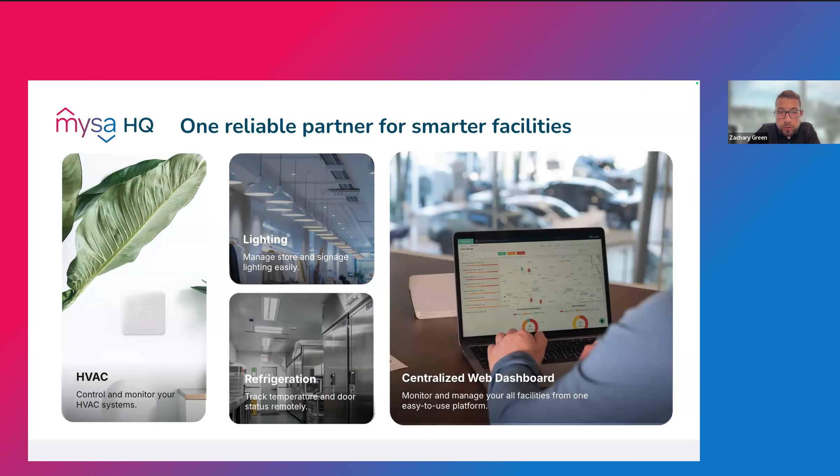Yeah, thanks Kyle. I'm happy to be here and represent Mysa HQ today. I often like to tell people when I describe Mysa HQ that we are a reliable partner for smarter facilities. And I like to say partner because we view our relationship with our customers as more than just selling connected thermostats or refrigeration sensors. We're often the go-to source or a trusted advisor for addressing various challenges or issues our customers have.

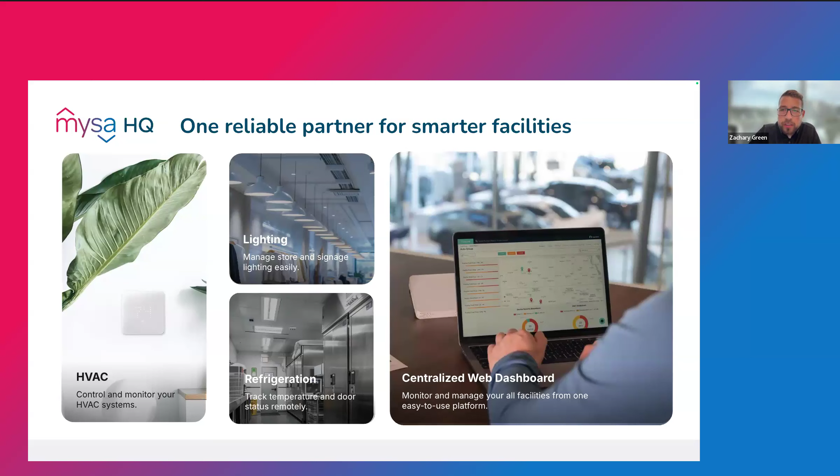And one challenge we've heard repeatedly from our multi-site customers, particularly in California, is understanding the new California heat illness regulation that came into effect last year, and then turnkey solutions for meeting compliance. So that's why we wanted to put together this webinar today, and I'm super happy that Eric's here to join me to explain more on the legal side, and I'm here to talk about the tools and solutions for meeting compliance. Great, thank you Zach.

So let's start at the top. Eric, why don't you give us an intro on what the rules actually state? So what are we talking about here? Sure Kyle, again thanks everyone for having me.

I am going to go briefly over the rule. The heat illness rule for indoors was a long time coming in California. As everyone may be aware, California has been enforcing outdoor heat for quite a while. This is really a data-driven rule, and what I mean by that is the obligations are triggered by certain thresholds and data points. So this applies to all indoor workplaces when it can reach 82 degrees, irrespective of humidity, just your flat temperature, when employees are present.

As soon as that gets triggered, you have to have procedures for provision of water. You need to provide cool-down areas, training, acclimatization, and basically just have yourself a written program together with all of these requirements. There are no exceptions, and there's sort of no timing provisions. What I mean is, if your AC goes out and it goes up to 82 degrees, you're within the standard. So you kind of have to be prepared for the unexpected in order to remain in compliance.

And then there's a second tier of requirements that come in when your heat index or regular temperature reaches 87 degrees. Again, you have to be able to monitor in real time these conditions so you know when these added requirements come in. These requirements include engineering controls, administrative controls, and potentially personal protective equipment.

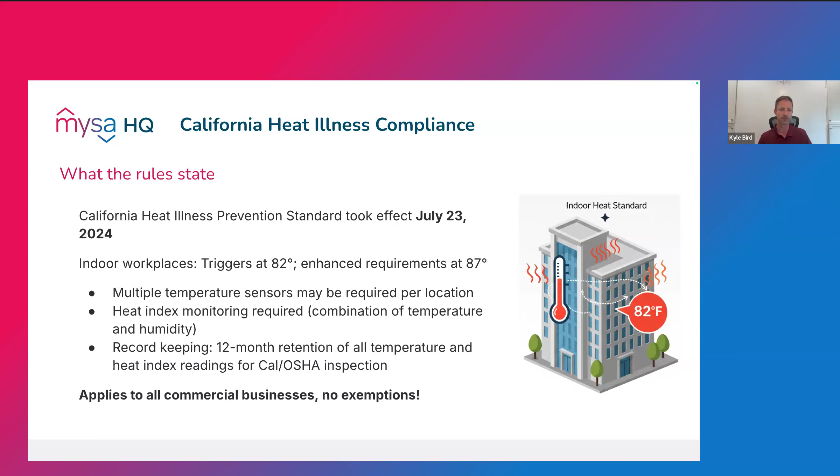Wow, a lot to it. Thanks for breaking that down. There's a lot to unpack there. So, I encourage the attendees, add some questions in there as it relates to you, and we can get to them at the end. So now getting into some fines and penalties.

What is the risk that we're taking on here? So these are, I guess I'm going to start in two ways. We don't really know what enforcement looks like yet. We don't have the data. We do know that the outdoor heat rule enforcement has probably been the second or third highest cited, most frequently cited standard, year over year since its implementation. We would expect there to be a lot in the indoor heat area as well.

And we have seen Cal OSHA come out and issue seriouses, and in one case, one willful for outdoor heat. But you could be looking at just on a complaint or a heat illness, just in fees, easily over $20,000 just in citations. Now, if you add direct cost impacts to your business from the heat illness, and then indirect costs from overtime and loss of productivity, a single citation event could easily cost the business upwards of $50,000. And when you start thinking about profit margins for retail and restaurants, you're looking at $500,000 potential in sales you're going to have to generate just to cover the cost. So these are real business impacts and need to be taken seriously.

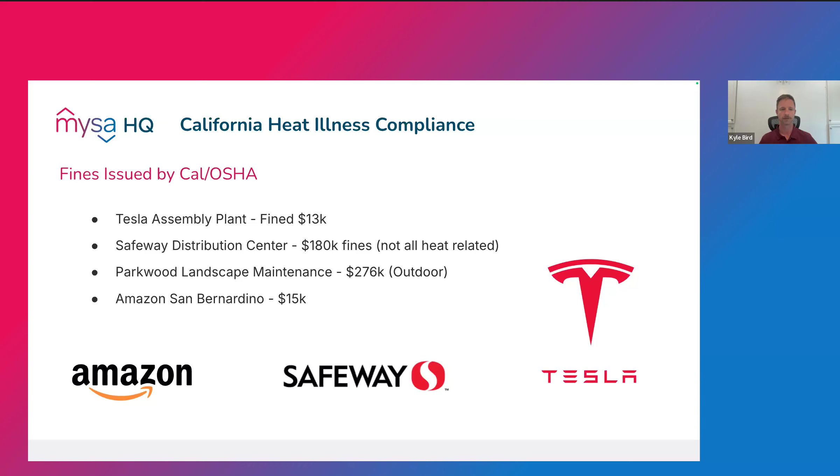And you don't want that to be your first measurement, to be the inspector with the thermometer in their hand. Yeah, definitely not. Proactive is the way to go.

All right, so we've outlined some of the rules, the regulations, the fines that are starting to take shape. So let's bring it home a little bit and talk about what does this matter to restaurants and retailers. I can see that we have some folks from both restaurant and retailers online here. So what does it mean to them? Zach, do you want to take the lead on that?

Yeah, thank you, Kyle. Because, as Eric just said, because of the way the regulations are written, it's impossible to show compliance after an incident has occurred if you don't have the data. So this means you must have proactive, continuous monitoring and compliance measures in place. You need to have temperature tracking and employee protections before an issue arises. And then once a violation does occur, it's almost too late to retroactively implement those measures or provide the adequate documentation, leaving businesses quite vulnerable. As Eric said, there's been a 400% increase in heat-related illnesses since 2022.

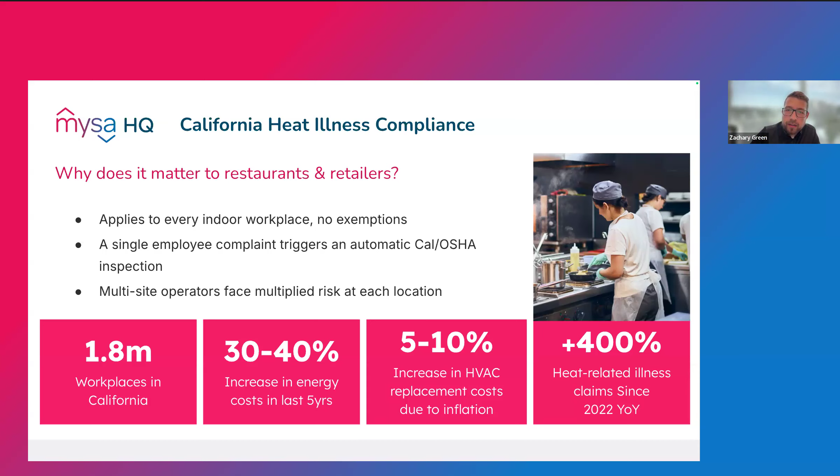And all this is on top of an already very challenging environment for businesses in California, which have seen labor costs rise and energy costs rise 30 to 40% over the last 5 years. We're seeing major increases in the cost of HVAC replacement and servicing, primarily due to inflation and the ongoing tariff situation. So running a multi-site retail business is quite complex and expensive, and this is just another added layer of complexity that needs to be managed.

So some businesses may operate partially or fully in California, but let's talk about the United States in general. What does it mean for the different states that might have something coming, or recently activated, for heat illness? Eric, do you want to take this one?

Sure. So the trend in this space is that regulations are continuing to pop up. I know we're in a phase where people are wondering what's going to happen on the federal side. We're not really expecting that heat rule to move forward. The feds have continued their national emphasis on heat during this period, so they'll be rolling out with the general duty clause.

But state by state, specific regulations are popping up. The initial trends were to focus on outdoor heat, but the new regulations coming out are just heat illness prevention, and they are not specific to indoors or outdoors. We have yet to see whether we're going to have the two-pronged approach we see in California, where there's an outdoor heat rule and an indoor heat rule. But certainly the trend is that state by state, we're going to see more of these rules.

Temperature thresholds may vary, but we seem to be settling in on the mid-80-degree range for indoors. But you may be caught in a situation, particularly in the western states, where if you have multiple locations, you're going to have different requirements in terms of temperature, and you're going to have to keep track of different data sets to ensure compliance state by state. You could imagine needing a chart with all the requirements to make sure you can implement a system that will be compliant across all jurisdictions.

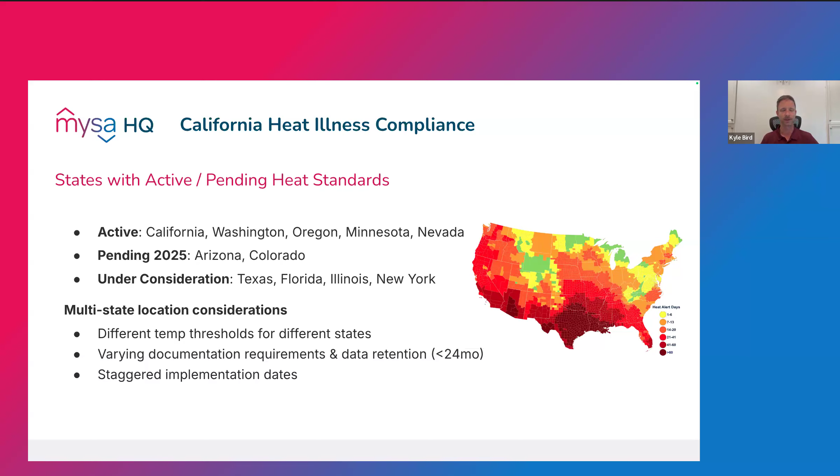Yeah, and it seems like there's more to come too. Although California is known for its policy making, I think there's a lot more to come. Agreed. So how are people managing with this?

We've talked a little bit about the parameters of heat illness, but how are people in the current state dealing with this? Zach, I think you have a pretty good understanding of this - do you want to take this one?

Yeah, thanks, Kyle. So we hear from our customers at different places like trade shows, where we're on site with them - these could be facility managers, mechanical contractors, or sustainability managers. They're asking how can we comply, and these are the three most common ways I'm hearing about. I'll cover all three, and there's some nuances to all of them.

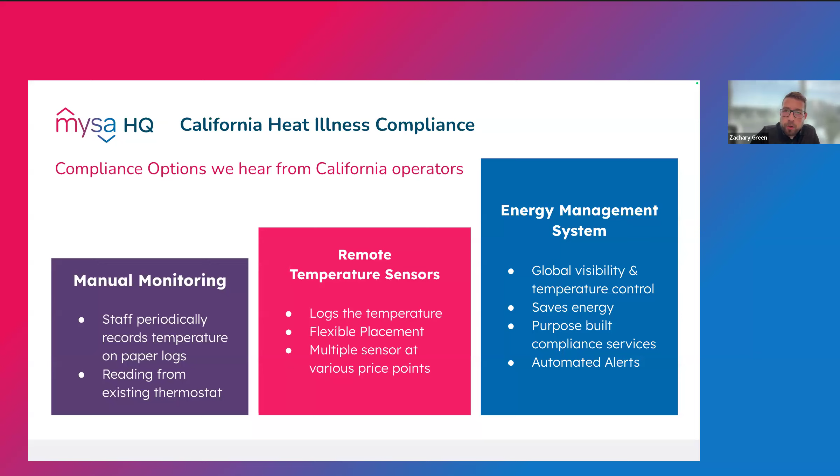So the first one is manual monitoring and reporting options. This one's pretty simple - you get a store manager to record the temperature on a regular basis, either on a paper log or another digital means like an app. You can also buy a remote or wireless temperature sensor that records the data to an app or centralized cloud platform. Lastly, you can use a remote temperature sensor that's part of a broader energy management platform. I'll cover each option in more detail, because there are some nuances to compliance and some edge cases you should be aware of when selecting a compliance solution.

So starting with manual temperature monitoring, which on the surface seems cheapest - you don't have to buy anything, although there are some real hidden costs. Technically, you only need to record the temperature when you're above the 82-degree threshold. However, this means your employees on site need to be aware of the temperature if it goes above that, and then take the monitoring action.

I have heard of some companies who are getting store managers to log the temperature every 30 minutes, regardless of whether the store is too hot or too cold, just to get employees in the rhythm and habit of recording the temperature. Obviously, you don't pay your staff to record temperature all day, so there's a real cost to doing so.

As Eric has mentioned, the temperature needs to be recorded in every area where an employee can work. This could be a kitchen, back office, break room, and that means you can't rely on just the thermostat in a manager's office. So depending on the environment, the temperature needs to be recorded in multiple places.

Another issue is if there's a particularly busy period or there's an emergency either at the store or with the employee. Recording temperature is not top of mind for most people, so you really risk having gaps in your data, leaving you exposed to compliance vulnerabilities.

As Eric mentioned, an investigation from Cal OSHA may come many months later after the initial claim, so there's always a risk that the paper copy goes missing or is hard to produce in a timely manner.

And then lastly, if we go back one slide, Kyle. Jumped the gun, good. It's all good.

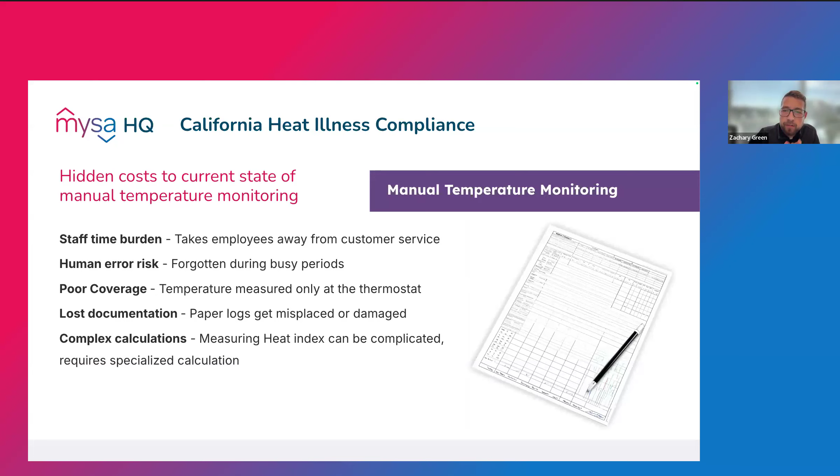Above that 82 degree threshold, you must measure more than just the temperature. You also need to measure the humidity to calculate the heat index, which is a complex calculation that can't be done on the fly. So you need to measure humidity as well, which makes manual reporting quite difficult.

So kind of one step above manual reporting is using remote temperature sensors. Some things to keep in mind when selecting a temperature sensor is choosing one that can measure humidity, so you can get that heat index calculation done automatically for you in the reporting.

You'll likely need more than one sensor placed around the building, which could limit the type of sensor you have. You obviously don't want an ugly cable if you have a really nice storefront, so you might need a wired or a wireless sensor depending on your needs.

If you do choose a wireless sensor, you also want to ensure the sensor has a long battery life. Consumer grade sensors you'd find on Amazon typically only last a year or two before the battery needs to be replaced. If it doesn't get replaced, you're paying someone to go out and replace it, or worse, no one replaces it, and now you're not monitoring the temperature, creating compliance gaps. Commercial grade sensors, like the one we supply at Mysa HQ, have 10-year battery lives, which really makes that total cost of ownership quite low.

You also want to know how the temperature sensor records data in the event of a power or network outage. Hardwired sensors and thermostats will likely be powered off in a power outage, which is the worst case scenario. If your HVAC system is down and your sensor is also down, that's when the temperature is probably rising, and that's when you need to record it.

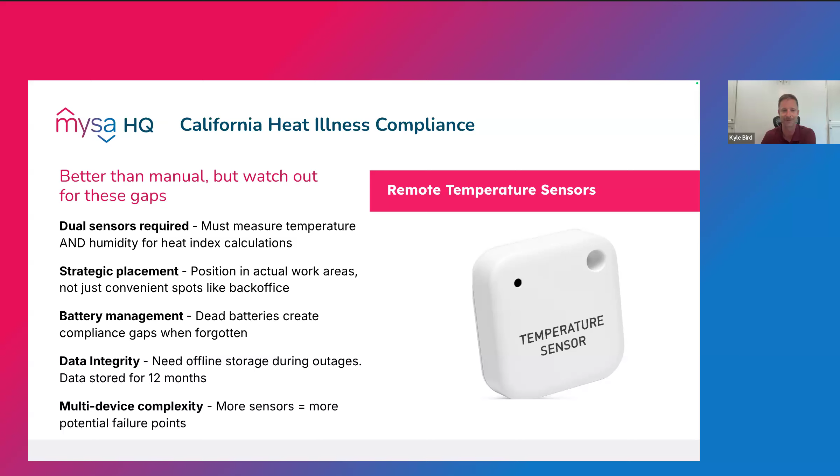No. Sorry, let's go on to energy management system.

Now, finally, and I'm obviously a little biased here, but I think the best solution for monitoring compliance is the energy management system. Your first line of defense is getting a thermostat that you can control remotely to make sure the temperature of the store or restaurant is set to a predefined temperature, and also having lockouts on that thermostat to ensure local staff are not setting it too high or too low. This gives you some buffer before the danger zone where you must be monitoring the temperature.

Some energy management systems on the market do have wireless sensors that can be integrated into your platform. The last thing people need is another login to manage, so it's always nice having it part of your one platform. Like I started off the call, a lot of the energy management providers are partners, and they are designing their solutions to be aware of this regulation.

So you should lean on them to help you comply, whether it's through reports that have been custom made for California, ensuring the data is being maintained for 12 months so you're not wiping your data too prematurely. And the last one, if you're a multi-operator, is ensuring that your compliance tools are implemented consistently across all of your sites. This is really going to help ensure that you have no compliance anxiety if you manage more than one site in California. Also, customized alerts can be set up to be sent to the right people at the right time.

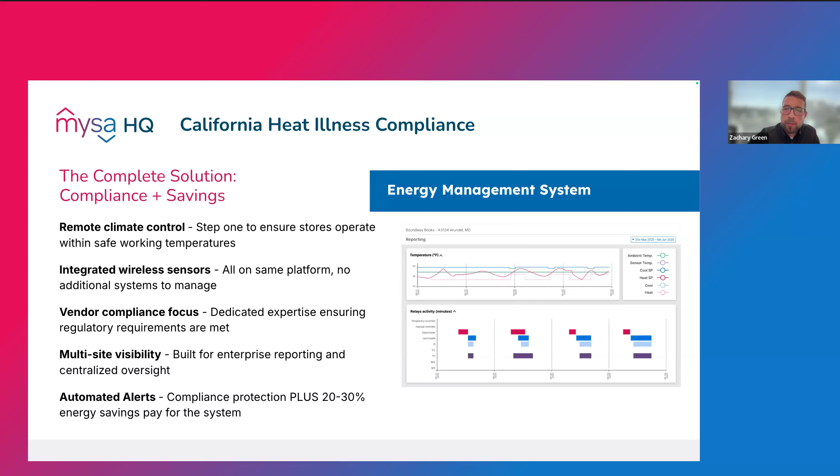You can imagine a scenario where your energy management system detects that the thermostat or HVAC system is failing to meet the set point. Then you can get an alert to roll a truck, which gives you those precious hours to implement a solution before it becomes a problem.

And then lastly, bring it back to the main topic of the webinar of turning risk into ROI. Given the high bar of ensuring compliance within California and potential fines for failing to do so, getting an energy management system can not only ensure compliance, but also drive huge ROI through energy efficiency and some other savings.

For a typical retailer or restaurant location in California, energy costs can be as high as 15 to 20,000 per year. With a solution like Mysa HQ, which can set back the temperature of your HVAC unit at night when it's not needed, that can realize savings of 20 to 30%. If you have 50 sites in California, that can easily be $200,000 in savings per year just in energy efficiency.

Moving beyond that, there's other savings from reducing the number of unnecessary truck rolls. There's reduced labor for investigating temperature issues, which we hear are the most common issues for facility managers to deal with. And the right solution can help extend equipment life as you're reducing the wear and tear on your HVAC system through less usage.

And then finally, happier employees. Store comfort is critical to employees and their overall well-being. Store issues related to temperature are the most common facility manager complaint that we hear. Comfortable staff means they're more engaged, more productive, and there's less turnover. So that's lots of savings there as well.

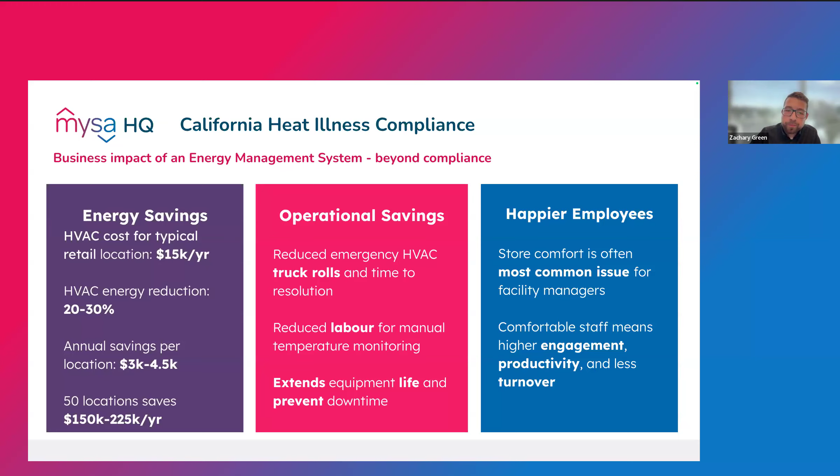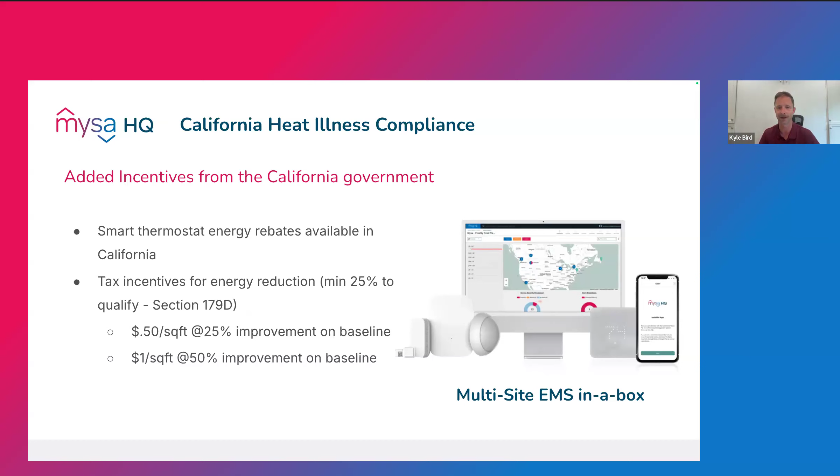So while California has lots of regulations, they also have a lot of incentives and rebates, particularly for reducing energy waste. There are many rebates and incentives for customers looking for energy management solutions, and Mysa is happy to help you navigate that landscape. We'll share a link to the California government site where they have some of that, because there are some thresholds to eligibility and things like that. But we'll let you make those decisions with your accountants. We'll share that out shortly.

So just to wrap things up a little bit, we want to make sure that you have the resources to be successful. So let's do an overview of what Mysa HQ provides, and then following, Nixon Peabody as well, to help you in this relatively new endeavor of heat illness.

So at Mysa HQ, we're a smart and scalable energy management solution. It comes in a box, which means it comes pre-provisioned, pre-programmed for your specific site, which makes savings super easy to deploy, easy to get, and just easy ROI. At Mysa, we design and deploy plug-and-play connected devices that give multi-site operators the visibility and control they need to reduce operational costs and chaos. If you're looking for a partner to roll out a connected compliance solution, we're happy to connect after the webinar or anytime.

Eric, do you want to give us an overview of how Nixon Peabody can help? Sure. So our workplace safety team is myself and my colleague, Melissa Peters. She was also a former Cal OSHA attorney, so we're sort of unique in that dual perspective in terms of practice groups.

We assist employers of all sizes and all industries with compliance issues. We're here to answer questions. We're here to take a look at compliance plans, and we can go through them and stress test them, putting our former enforcement hats on to identify issues and come up with practical solutions so you're ready for the OSHA inspection. I always like to say your OSHA inspection has already begun, and what I mean by that is the preparation and documentation you have now is going to mean everything later. So we're here to assist then.